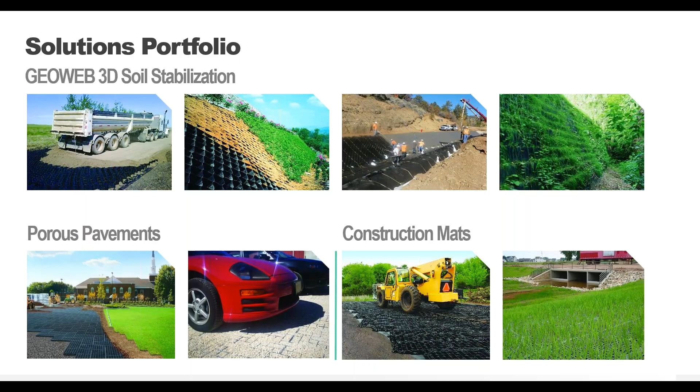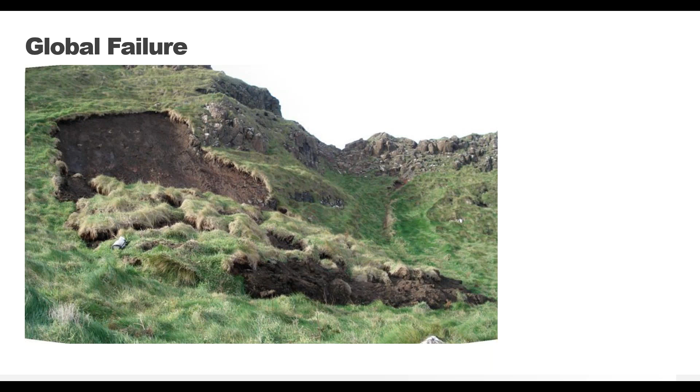We're going to start with a very quick overview of the broad classes of slope erosion. The big obvious slope failures are almost always global failures with large mass movements. We're not really going to be focusing on this type of failure and remediation today, so we'll move right along.

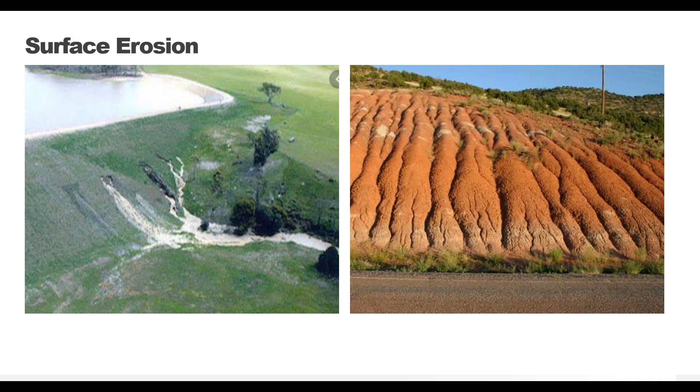Surface erosion is the name of the game today, and the main cause of surface erosion is due to water flow, whether from the crest of the slope causing rills and gullies, or coming from the middle of the slope due to an action like piping. Dams and embankments are susceptible to piping, and while the GeoWeb system can help with erosion due to piping, it will not fix the cause of piping, so keep that in mind. You can catch the on-demand webinar for flexible design solutions for resilient dams and spillways if that topic is a focus item for you. Visit prestogeo.com for more information on that webinar.

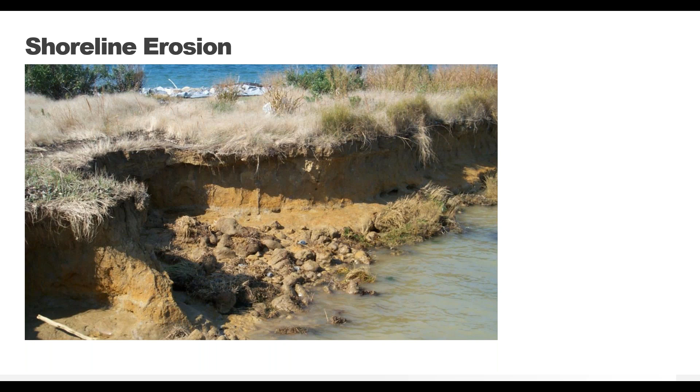Shoreline erosion occurs when rivers, ponds, and lakes create current or wave action that attacks underlying soils. Check out our upcoming webinar for reducing erosion along coastlines from rivers to oceans.

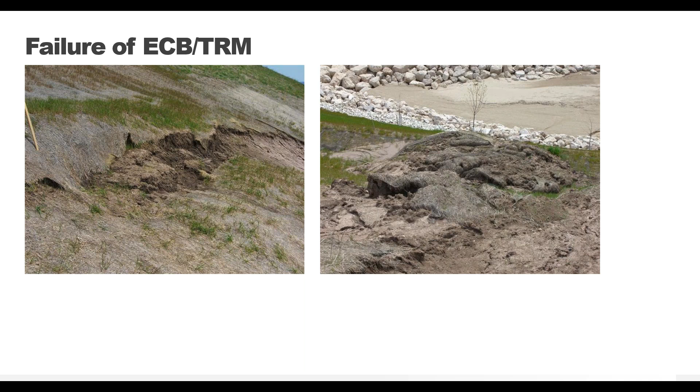Now, with all that refreshed in our minds, we'll cover some general information about GeoWeb GeoCells for those that may not be familiar with this type of product or solution.

The GeoWeb system is our version of GeoCell technology and consists of 2 main attributes. The first is the cell size. The cells come in 3 diameters: small, medium, and large, and varying cell depths. Cell sizes are selected following an evaluation of project-specific needs and site conditions.

The ultrasonically welded seam, where all the connecting points are, is very important to the function of a geocell. The stronger the seam strength, the better the performance of the geocell. Strong seams allow for heavier infill materials, steeper and taller slopes, and better lifetime performance.

GeoWeb is produced for consistently strong welds at cell junctions, while also maintaining semi-rigid ductile properties within the cell walls, high stress crack resistance, and overall toughness and long-term durability in the environment.

Our geocells do not use fillers or exotic polymer alloy blends, which can ultimately reduce weld strength and environmental stress crack resistance, and that are offered in some competing products in the name of increasing cell wall stiffness. To avoid weld failures and the damaging effects of differential settlement, uniformity in performance across all elements of your geocell system is much more important.

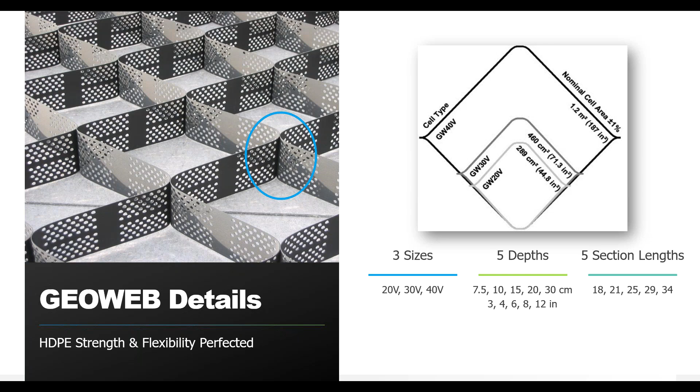The second characteristic of the GeoWeb system is the infill material. There are 4 main types of infill that can be used with the GeoWeb system based on the project type and required protection: coarse sand, topsoil, crushed aggregate, and concrete. This often allows for the use of on-site materials, eliminating the need to import fill. We'll work with you and review gradations to determine the most cost-effective infill material as part of our free project evaluation.

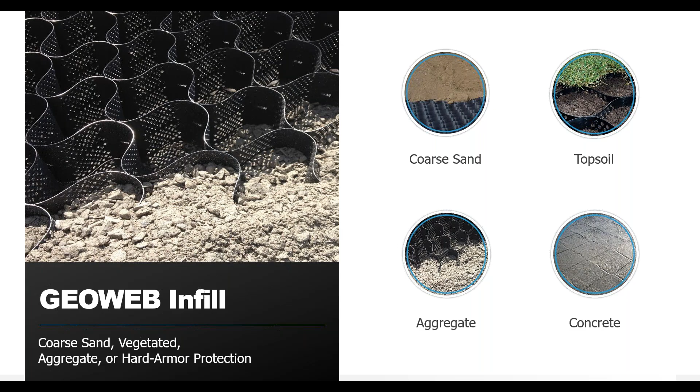GeoWeb and our accessories are 100% made in the USA under stringent quality assurance and environmental control processes. They comply with all requirements for Build America, Buy America, and the Infrastructure Investment and Jobs Act.

Speaking of quality control and the environment, Presto Geosystems, the leader in geocell technology, announces the publication of the industry's first environmental product declaration for geocells. This milestone reinforces Presto Geosystems' ongoing commitment to reliable infrastructure and environmental quality.

GeoWeb is manufactured from a proprietary blend of high-quality virgin high-density polyethylene resin and has proven its durability over the past 40+ years. GeoWeb does not contain any fillers such as calcium carbonate, recycled materials, or polymer alloys. The GeoWeb system is designed to last over 100 years, with lab tests showing it can withstand up to 149 years before any carbon black degradation, even with continuous sun exposure. We stand by our data, ensuring you can build confidently with materials you can trust.

The system components are all the supporting pieces that help the GeoWeb protect the slope surface from erosive forces. They ensure a uniform performance of the interconnected system across your entire project area.

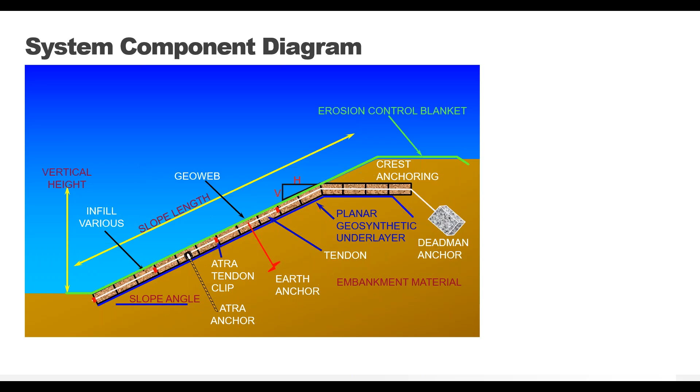The GeoWeb panels come in discrete sections with an average size of around 250 square feet per section. Your project is most likely going to be bigger than that, so multiple panels will be needed.

The AtraKey is the first component for a completely integrated system, connecting each individual panel of GeoWeb into a single web that covers the entire project site. This allows for faster installation of the GeoWeb and will last the lifetime of the project, ensuring your slope is protected and the GeoWeb system will not fail under anticipated loads.

The specific engineering values of the AtraKey will ensure the system holds up to loading over time without any corrosion like you might see in staples, or the failure of underperforming cable tie systems, or any cumbersome hand acrobatics needed with two-piece connectors. Our spec sheet calls out the specific engineering values required for this patented connector.

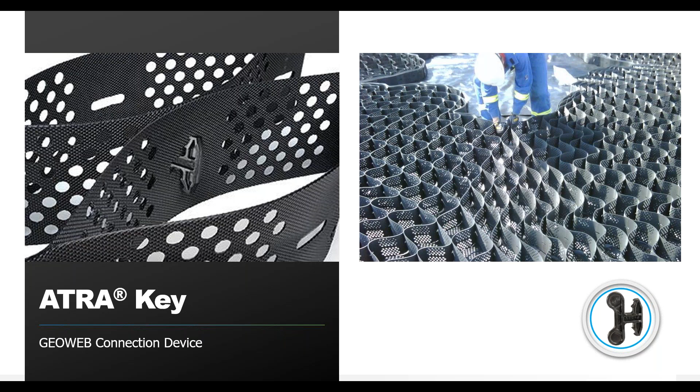Next, we can take a closer look at anchorage options. If the GeoWeb panels are laid completely flat, anchorage is usually not needed because gravity can do all the work. However, as your slope angle increases, the driving force of the infill material exceeds the available frictional resisting force, and some type of anchorage system is required.

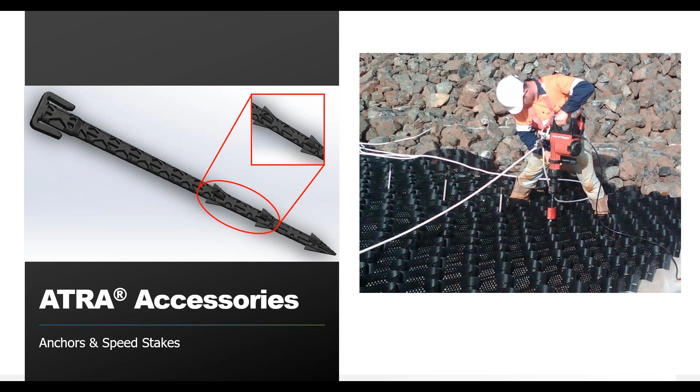For shallow slopes, think less than 2 horizontal to 1 vertical or 26 degrees, stake anchorage is usually sufficient. We have two options for stakes: one made of standard steel rebar, and one made of HDPE, shown in the left photo. If you're in a saline environment like a coastline, the HDPE speed stake is going to be a lifesaver compared to corrosion-prone steel. Stakes can be driven by hand or by power drill for easy installation.

For steep slopes greater than 2:1, where the native soil is highly erodible, or over a surface that cannot be punctured, such as a liner, a tendon anchorage system can be used. Our Atra tendon clips transfer the load from the heavy infill material to the tendons and up to the crest anchorage system highlighted in our earlier diagrams.

Only the Atra tendon clip is specifically designed to fully transfer, safely and securely, the forces placed upon the geocell. Every accessory and feature has been designed and tested to work together, so we go from problem to design to construction solution, with modeling that replicates your real-world forces.

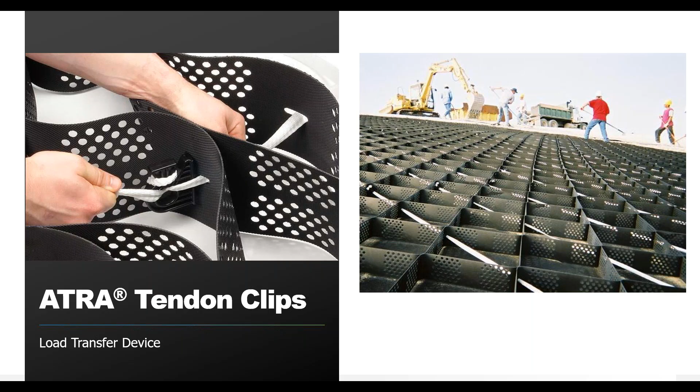The GeoWeb panels prevent significant movement of the soil by confining it to individual cells. By separating the soil into these smaller segments, the system resists mobilization of the entire slope face due to hydraulic loads, thus preventing soil erosion.

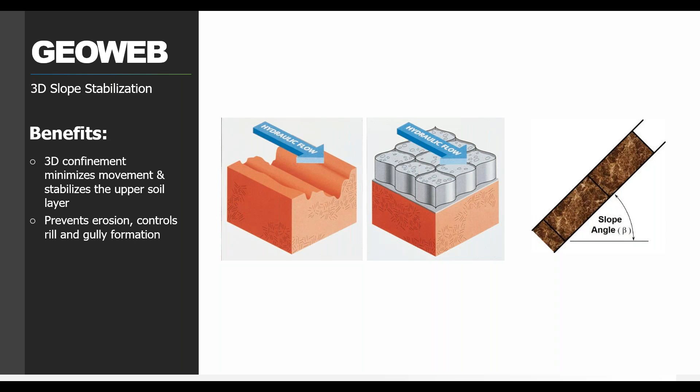It's important to reiterate that proper installation of the GeoWeb system includes embedding GeoWeb into the crest of the slope. This prevents water from flowing beneath the GeoWeb and undermining the system, so no rills or gullies form beneath it leading to failure. The system provides a way to fully vegetate slope surfaces that otherwise could not support sustainable plant life, increasing overall slope stability by interlocking with the vegetated root zone.

Stone and concrete materials can also be confined within the GeoWeb panels, again on slopes that would normally be too steep to allow for most natural stone slopes.

Vegetated slopes are the most popular option for slope protection because they can result in the most attractive appearance with little to no maintenance.

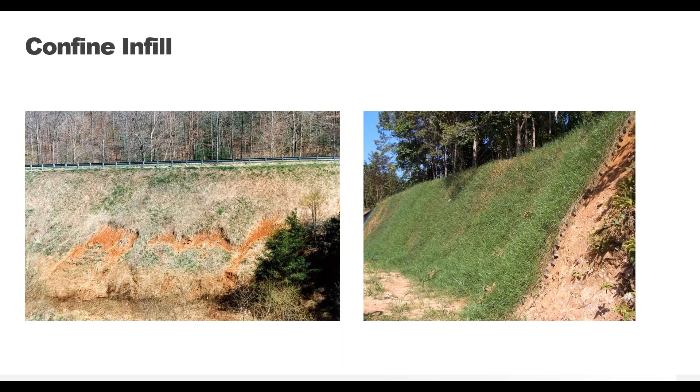Permeable slopes can be installed where high rainfall is anticipated or when construction projects are located in arid locations. This approach can aid in the design of a project by limiting runoff from the slopes and allowing water to permeate through to the underlying soil.

Hard armored slopes are most beneficial where very high water flows are anticipated, such as dam spillways or along channel walls.

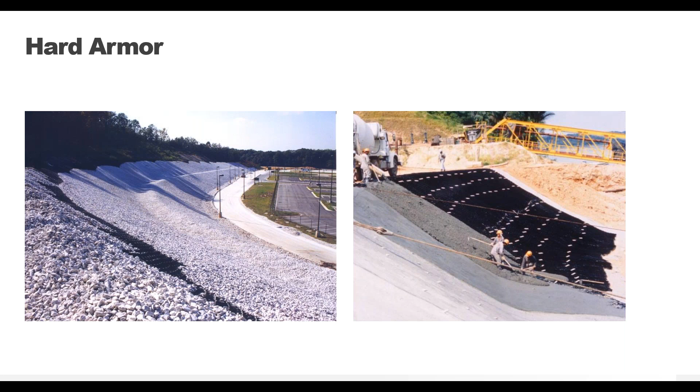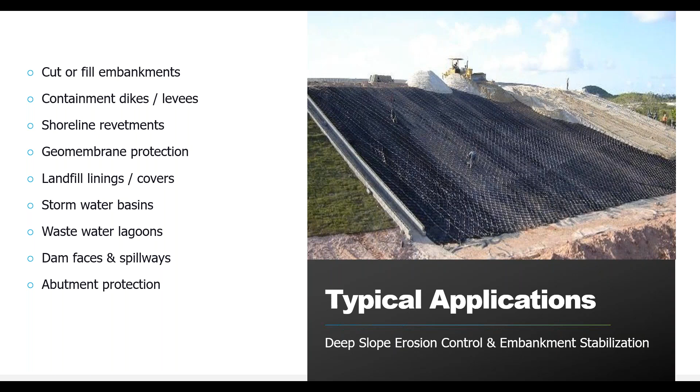Now we'll look at a few case studies to show how the GeoWeb system can be applied to different application types. Our first application type will be for vegetated slopes.

The GeoWeb system allows tall, steep slopes to be vegetated, protecting slopes that are normally too steep to vegetate with 3D erosion protection.

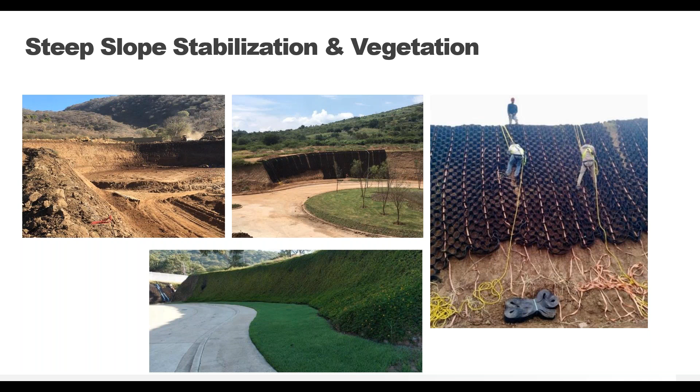Here we see space constraints at the toe of the slope in the form of another access road, so the slope could not be regraded into a gentler slope. A nice feature of the GeoWeb slope system is shown in the after photo, where a guardrail is installed at the crest and a fence is installed at the toe.

There's no limit on this sort of infrastructure being installed near or on the GeoWeb panels. That's a great benefit for tight spaces like this one.

This slope along a road in Ohio shows a common problem solved by the GeoWeb system: erosion and washout of soil from slopes onto your road surfaces.

Covering the slope with the GeoWeb system and filling with topsoil allows for a vegetated slope without the concern of having to constantly replace the soil after storm events.

We recommend some sort of surface protection, such as hydroseeding or erosion control blankets, be used over the GeoWeb panels until vegetation has had a chance to grow.

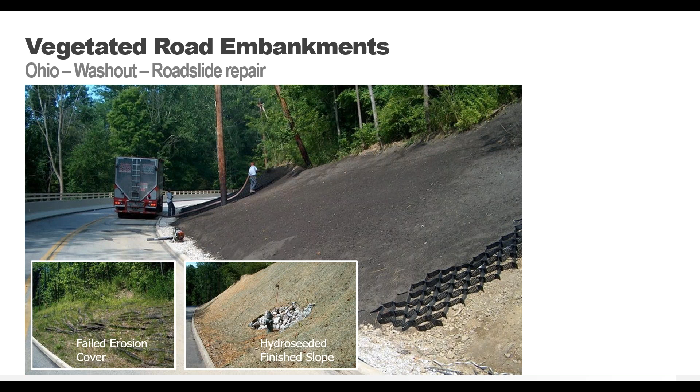Embankments along roadways have to deal with sheet flow runoff from the impervious surface, like the slope here, for a Maryland State Highway Administration project.

The sheet flow can cause sloughing of large sections of the upper topsoil layer, causing deep rills or gullies and preventing vegetation from taking hold.

The GeoWeb system holds the soil in place while allowing water to run over the surface, so no more gullies, and vegetation can form deep roots to further stabilize your slope.

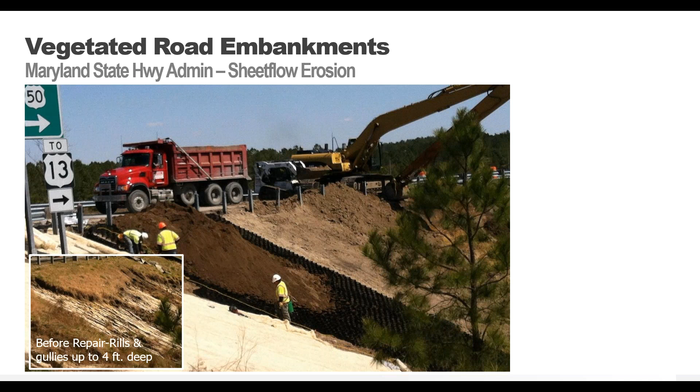Road widening is becoming more common, with DOTs trying to find more roadway space without displacing any significant structures. The slopes or embankments are usually where that additional space can be found, as shown in this road widening project in New Hampshire. The GeoWeb slope protection system allowed for steeper slopes to be created without erosion concerns. The system can be installed and vegetated quickly, so there's not a long construction time to shut down your important roadways. Ease of speed and construction are important features of the GeoWeb system that everyone appreciates.

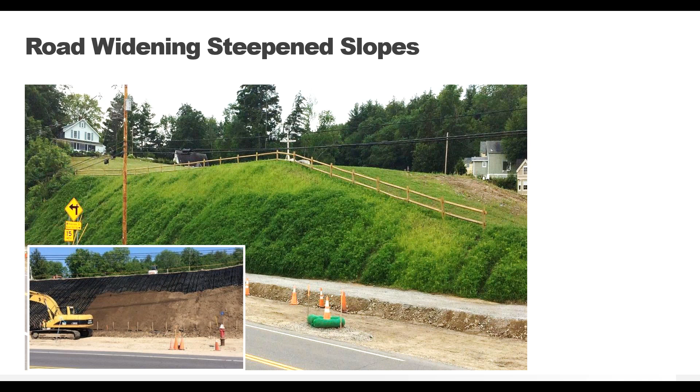This next example shows the GeoWeb system along a shoreline embankment of a large pond. This is also a vegetated system and was used to help stabilize the embankment and prevent further erosion. This crew did not take advantage of power hammer drills because it was a small project.

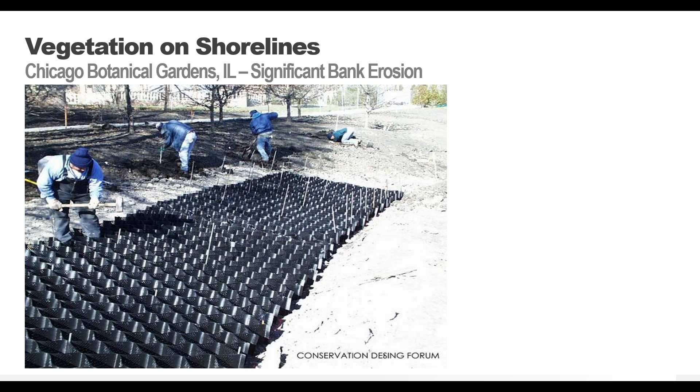Sheet piles were put in place to allow for a dry construction environment, and this time the GeoWeb panels were anchored using stakes because the slope angle and slope height were pretty low. The GeoWeb was filled with native soil from the pond, so the same plants would grow over this area, creating a seamless look.

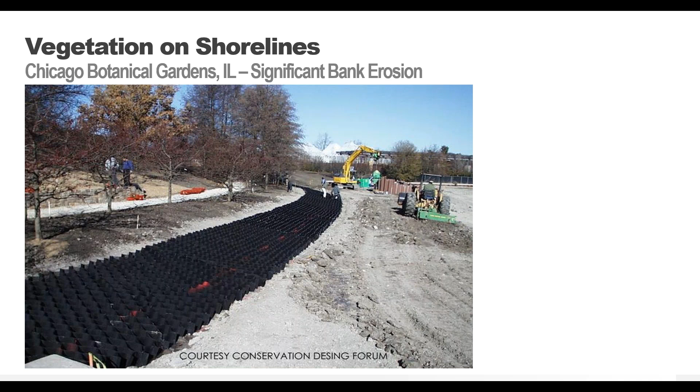And once the GeoWeb system was in place, the sheet piles were removed, and there's now a thriving water garden in place with a much more attractive and stable shoreline that requires very little maintenance.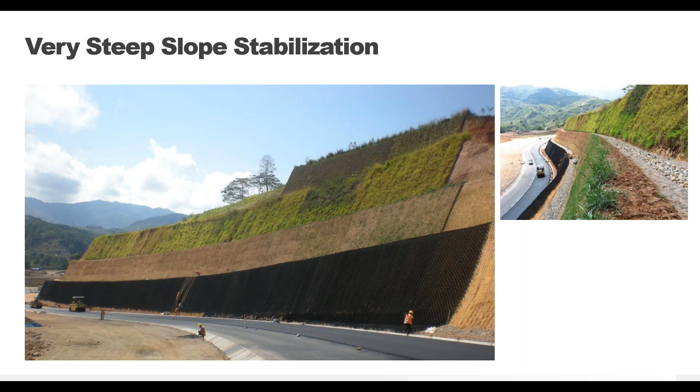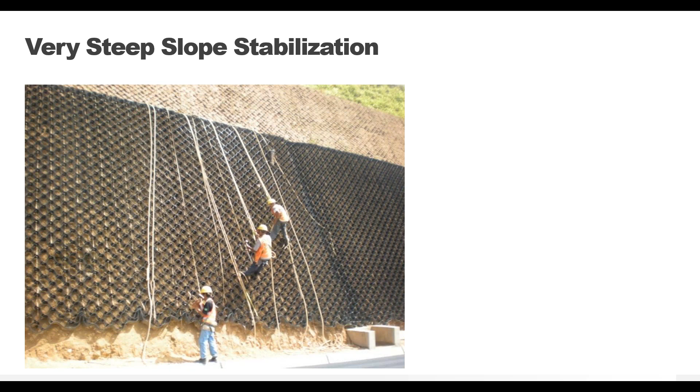The project required tendons through every row of the GeoWeb panels due to the steepness and the weight of the infill, and earth anchors were used at the crest of each slope because a dead man trench would not fit on top of the narrow terraces. They also chose to use a biaxial geogrid beneath the GeoWeb for additional soil control.

And here's the final product. The vegetation has taken hold and the slopes are stable, even at such extreme slope angles.

This case study shows the GeoWeb system used to stabilize the cliff between Scarborough Spa and the Esplanade on Scarborough's South Cliff. The project involved piling along the rear of the spa complex with horizontal drainage components and regrading of the slope to address instabilities and protect this historical building.

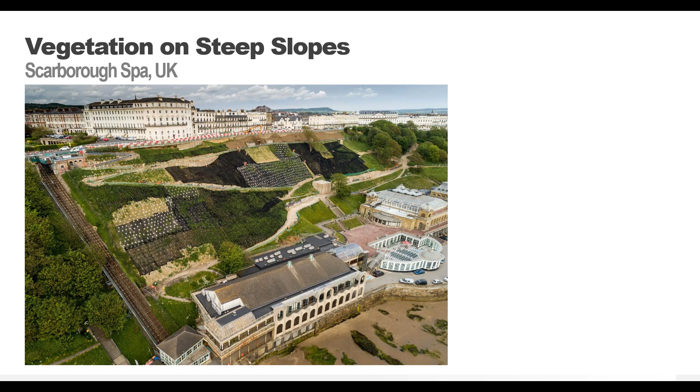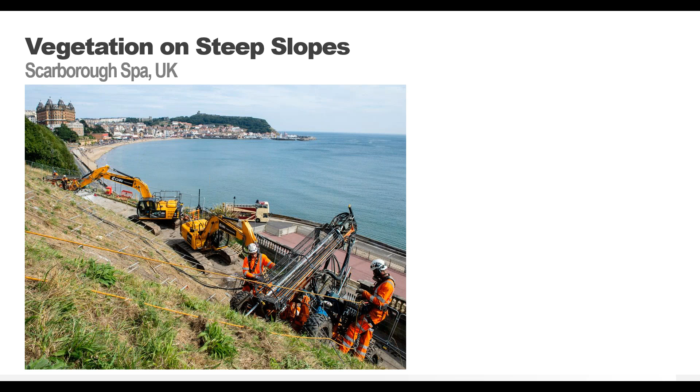Over 4,500 soil nails were installed for reinforcement, and the GeoWeb system installed for revegetation of the slope face and for surface stabilization.

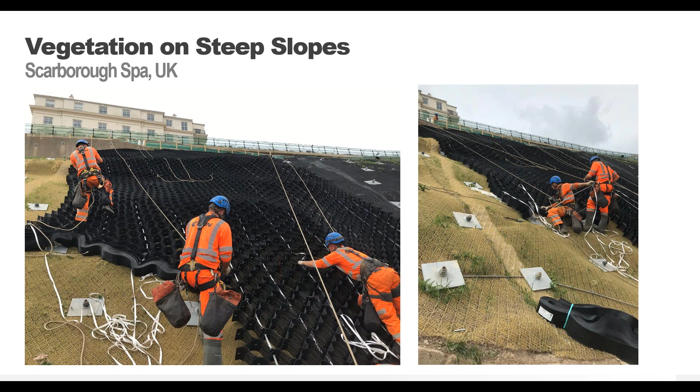The GeoWeb system, with patented ATRA Tendon Clip load transfer devices and a 6-inch or 15-centimeter GeoWeb geocell, secured the system to the slope with a fast and safe installation, even on slopes with varying steepness, including up to 60 degrees and around existing trees and walls, like you see here.

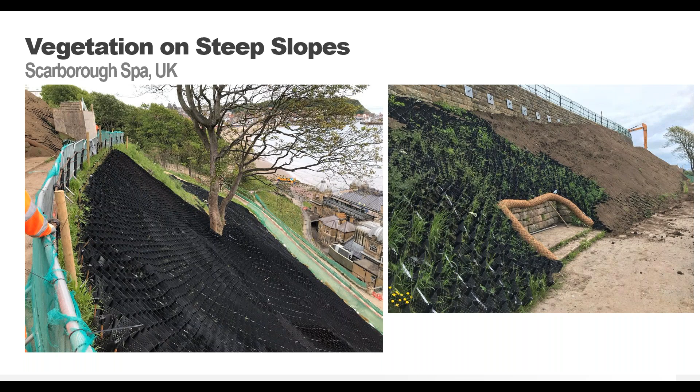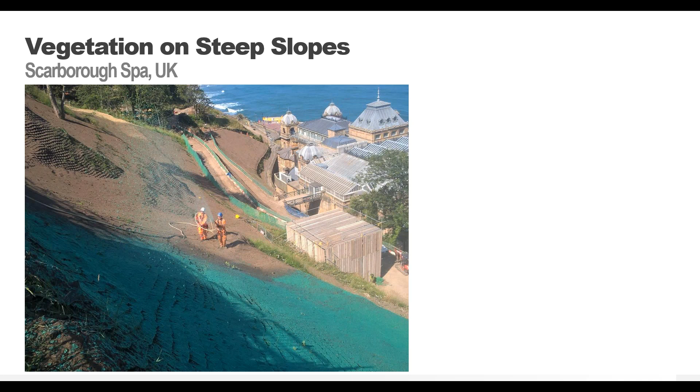Once the GeoWeb system was secured, over 3,600 tons of topsoil was placed and hydroseeded, with the teams working collaboratively with Presto Geosystems and our local agents Greenfix for this permanent stabilization solution.

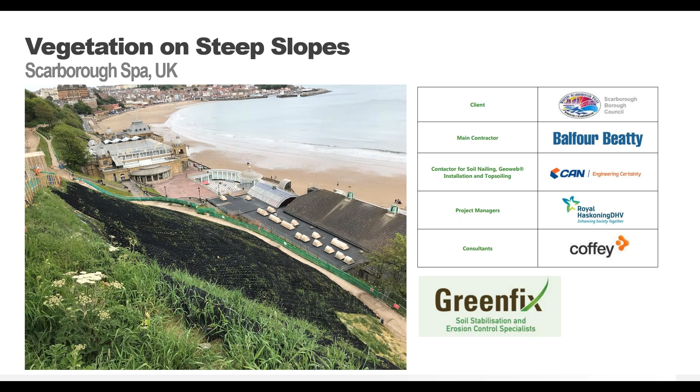The Scarborough Borough Council confirms this slope stabilization project has resulted in the protection of 380 homes and 38 key businesses with a combined value of £114 million.

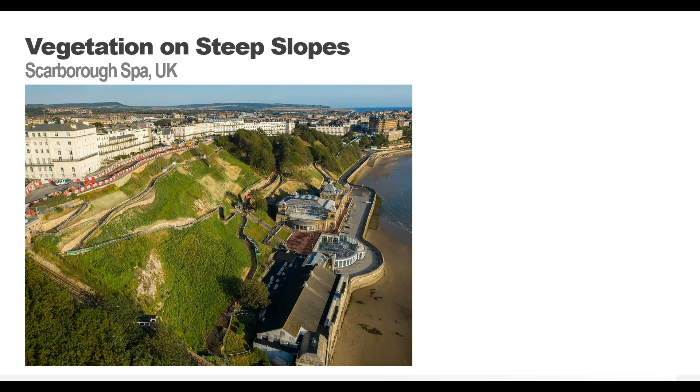The next application type will be aggregate slopes. Aggregate infill can provide a low maintenance solution, great for areas where vegetation may not grow easily or where stone is more common. Aggregate infill allows for water infiltration, so it can collect runoff from your road surfaces and be kept clean fairly easily.

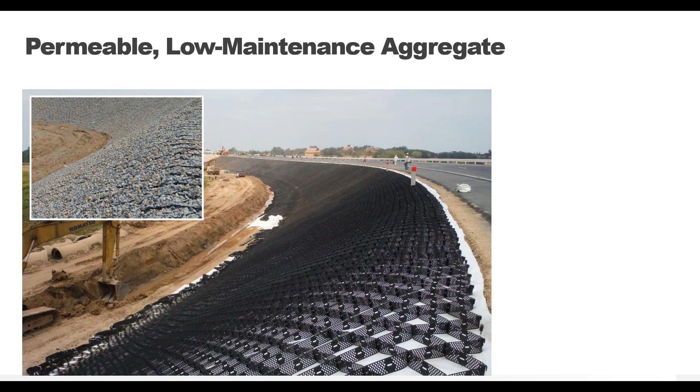The 194th Avenue Slope Protection Project in Calgary focused on stabilizing a steep slope adjacent to a geosynthetic reinforced soil structure. The 1-to-1 slope's south-facing orientation and lack of irrigation made it especially susceptible to erosion, compromising the existing vegetated cover's stability.

In response to the need for a durable, low-maintenance solution that would seamlessly blend with the natural environment, Layfield Canada recommended the GeoWeb slope stabilization system. This choice was driven by its exceptional erosion control properties, addressing the slope's specific protection requirements while ensuring long-term stability and visual harmony with the surroundings.

Many underpasses around Calgary have mountainscape designs using concrete, and this design would have a similar aesthetic.

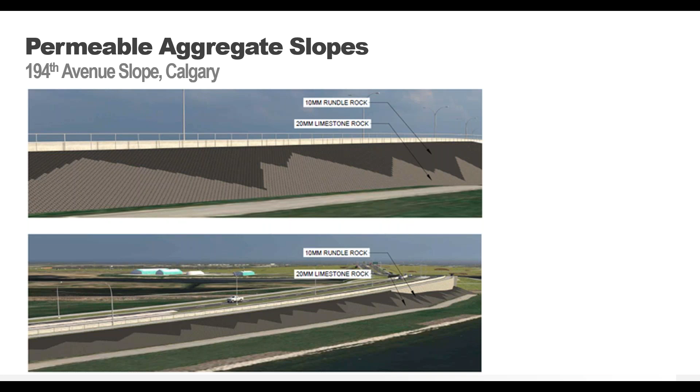A non-woven geotextile separation layer was placed, followed by the 30V4 GeoWeb geocells and TP225 tendon anchored by earth anchors strategically positioned at the crest of the slope to secure anchoring of the system. The ATRA tendon clip load transfer devices were placed in accordance with total load calculations determined as part of our free project evaluation in collaboration with project engineers.

The civil works were done by Graham Construction, installed by Wire Construction. The geotechnical testing done by Terracon, with project design by ISL Engineering, and the teams working collaboratively with Presto Geosystems and our local agents, Layfield, for this permanent stabilization solution.

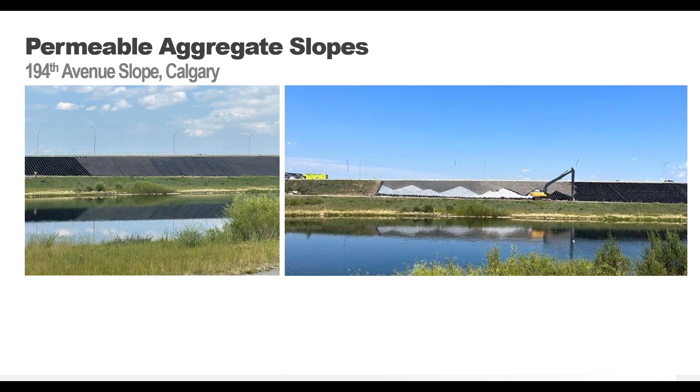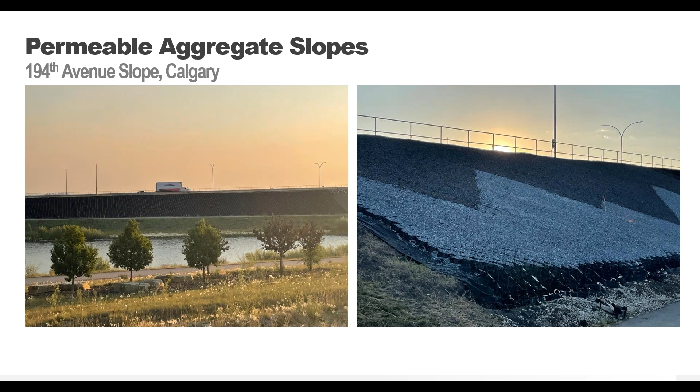The system came together quickly. After the GeoWeb system was secured, the stone fill was meticulously arranged within the GeoWeb's 4-inch deep cells to craft an aesthetically pleasing mountainous landscape on the slope with permeable aggregate.

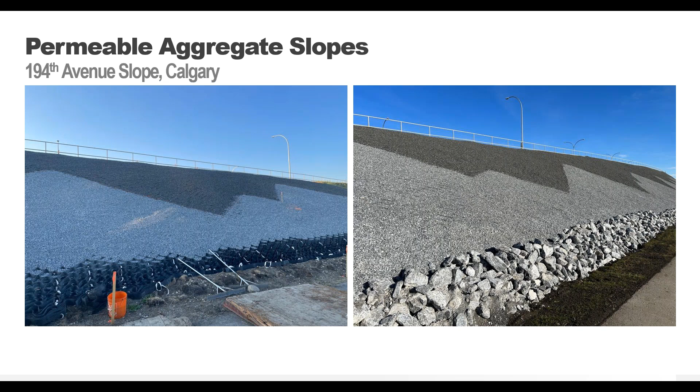And this project seamlessly combined functionality with landscape aesthetics for the 194th Avenue slope in Calgary.

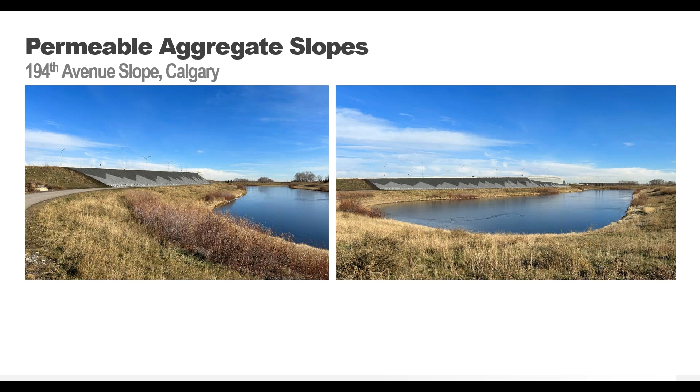The Minnesota DOT and the Wisconsin DOT, in collaboration with Presto Geosystems, Ames Construction, SRF Consulting, used the GeoWeb system to help stabilize the surface around bridge abutments and along railroad tracks and crossings as part of the Dresbach Bridge project.

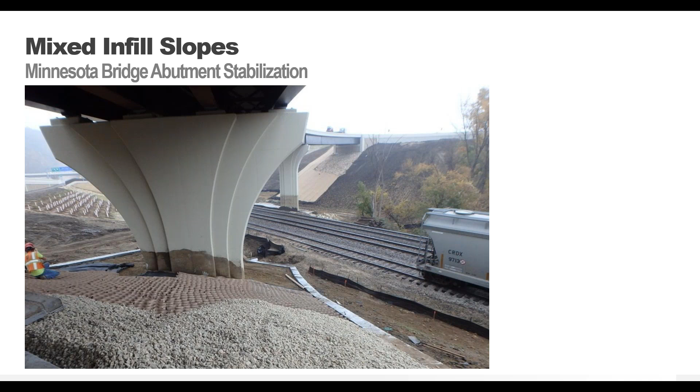The I-90 bridge over the Mississippi River between La Crosse, Wisconsin and La Crescent, Minnesota is a heavily used commuter route and part of the nation's longest interstate, Highway I-90, providing vital infrastructure for our nation.

The project goals were to provide a new structurally sound bridge meeting current structural and geometric standards, provide a reconstructed interchange, improving traffic safety, capacity, and access, and to ensure the resulting bridge and interchange fit naturally into the beautiful surroundings created by the bluff and river environment.

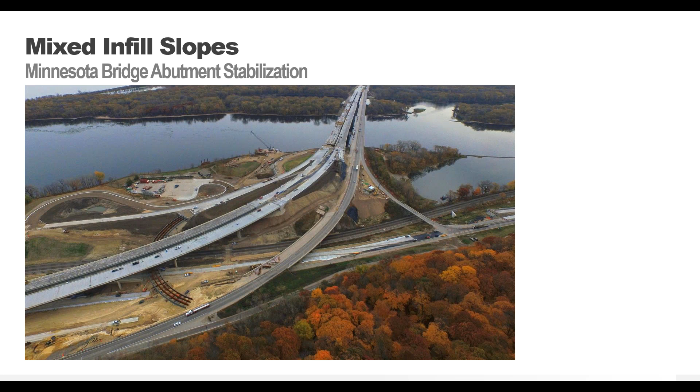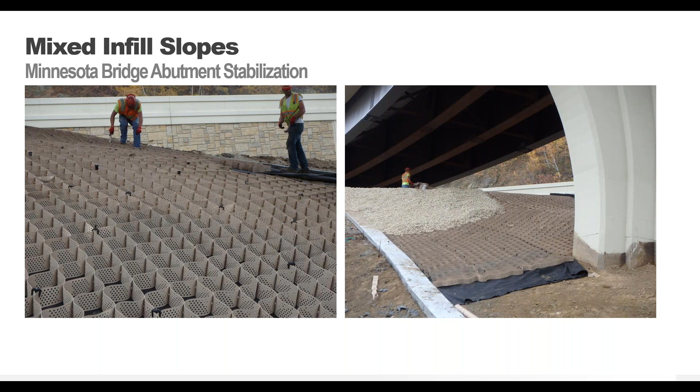Sand-colored GeoWeb was placed over a non-woven geotextile separation layer and used below bridges with aggregate infill where vegetation was not an option.

With the GeoWeb panels closely matching the color of the local aggregate for additional aesthetic appeal.

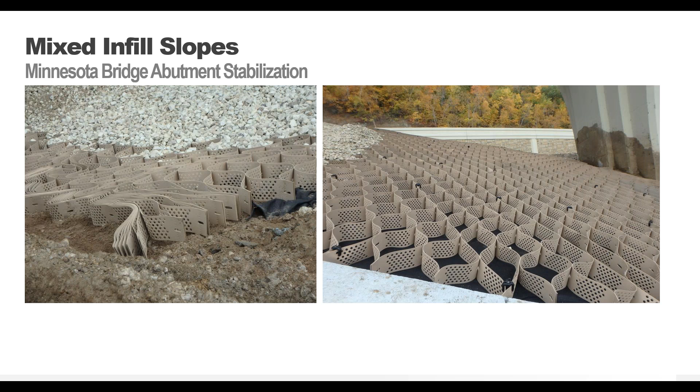Standard black GeoWeb sections were filled with topsoil, covered with an erosion control blanket, and vegetated on the slopes beyond the bridge abutment areas.

And the end result accomplished its goals of aesthetics and function, earning SRF and the Minnesota DOT the American Council of Engineering Companies of Minnesota Engineering Excellence Grand Award.

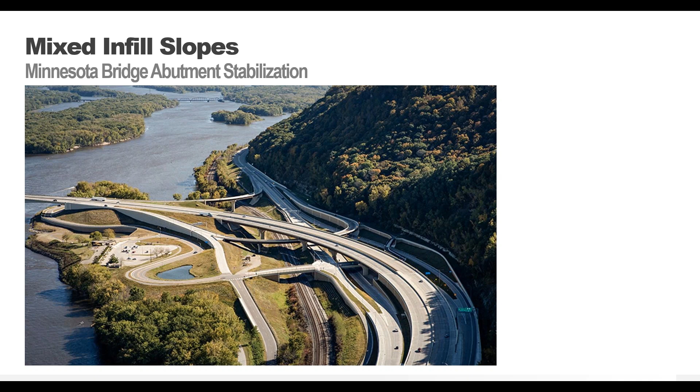The versatility of the GeoWeb system allows for a variety of infill, whatever best meets your project needs. In this case of a quarry abutting a roadway, aggregate fill was used on most of the slope, with concrete fill in higher flow areas. Which brings us to our next type of slope protection.

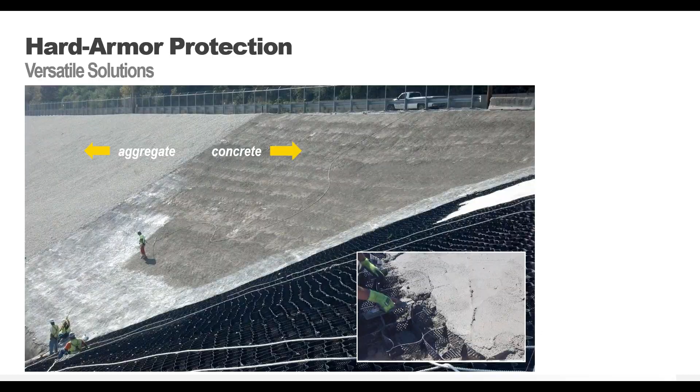The flexible, hard armored protection of concrete-filled GeoWeb slopes.

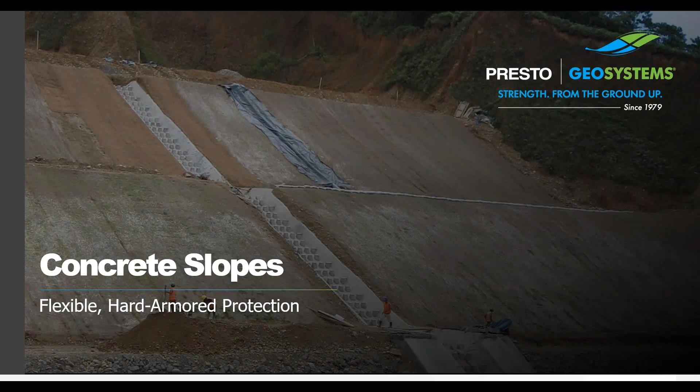Concrete infill is our last main infill type, and the system would no longer be considered permeable, but there are no maintenance requirements, and the embankments can handle significant amounts of stormwater runoff if needed.

The GeoWeb panels act as the formwork for the concrete and as the internal reinforcement, so no additional forms or rebar are required. The concrete is poured directly into the GeoWeb panels and screeded to the top of the cell walls, ensuring a consistent concrete depth without it slumping to the toe of the slope.

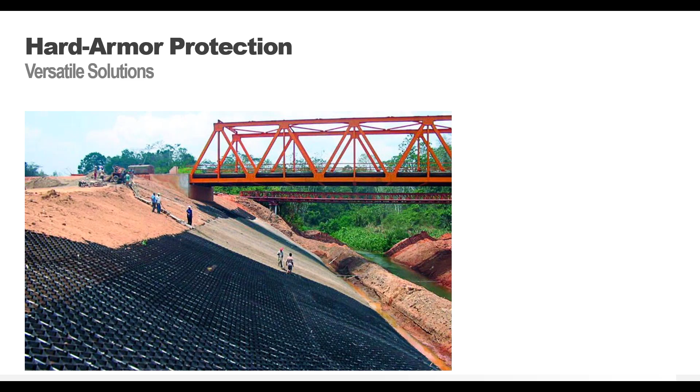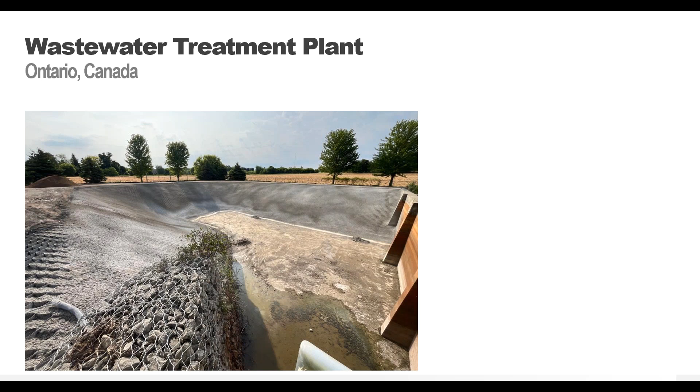The GeoWeb was installed at the facility's lagoon per evaluation recommendations with a tendoned anchorage system to protect the liner and prevent erosion.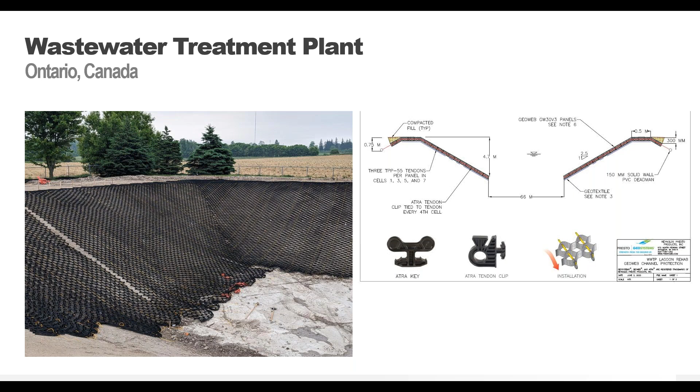The system was infilled with concrete as shotcrete, shooting the material straight into the cells and at low pressure, as you see in the photo on the left.

The contractors installing it said it was one of the easiest and fastest installations they had done, and will be recommending this treatment for upcoming projects.

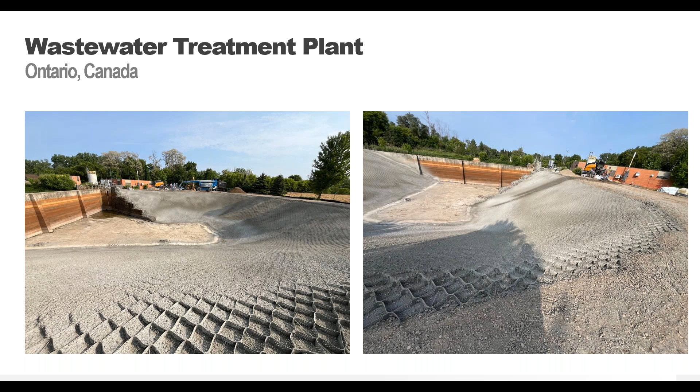This case study is for a concrete-filled GeoWeb slope at the U.S. Olympic Park in Utah. The mountain manager contacted Presto for assistance with designs for a 160-foot ski jump for freeskiers and snowboarders.

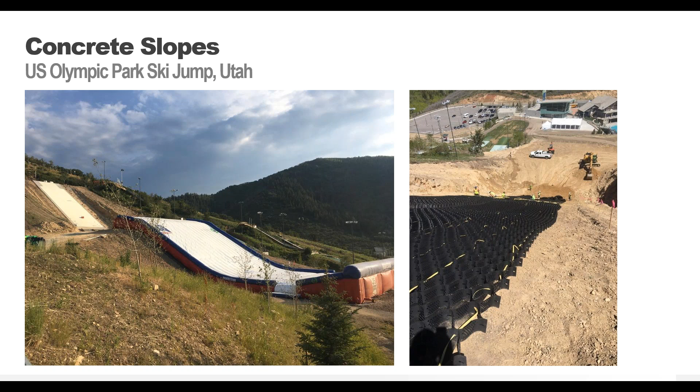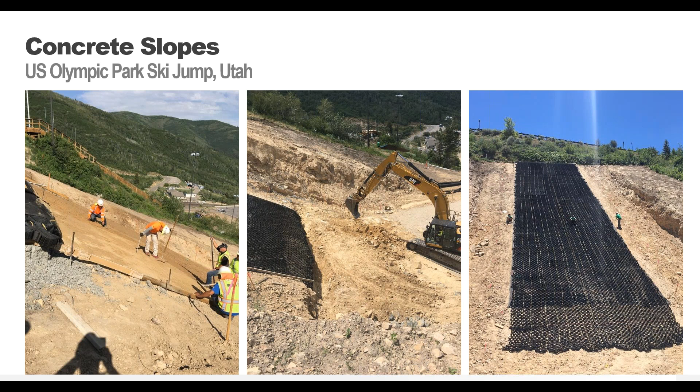It was important the subgrade surface below the GeoWeb material be graded very precisely. To secure the GeoWeb systems over the slope, a 6-inch deadman anchor was buried behind the crest runout with tendons and Atra-Tendon clip load transfer devices. Sections were connected side to side and end to end with Atra-Key connectors.

The concrete infill was poured in 15-foot sections, the full width of the ski ramp, in an alternating pattern starting at the top and working down the slope.

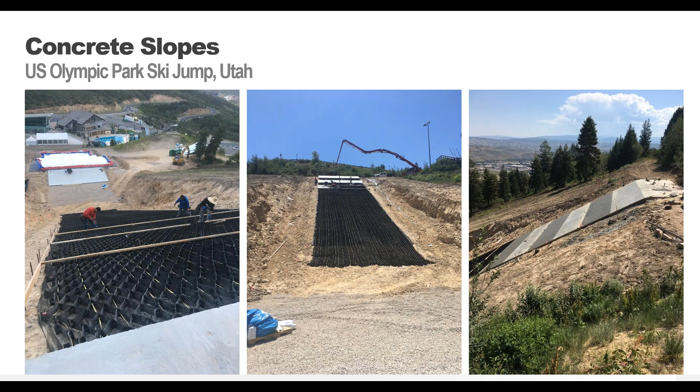Ski tiles, 4 inches by 36 inches, overlapped from top to bottom, were affixed to the concrete ramp with ram-set anchors. An even surface from tile to tile is critical to provide the athlete a perfect in-run on a snowboard or pair of skis and be able to practice their trick properly.

Once all the tiles were affixed, the two-piece jump was assembled and the airbag installed and anchored below the jump. Note that the athletes only use this equipment in the summer, as they prefer to practice on real snow in the winter.

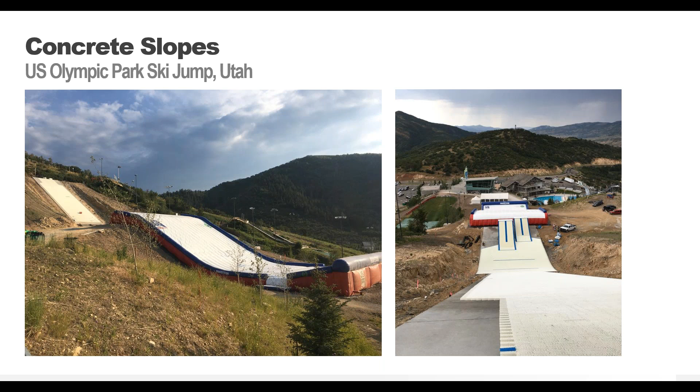Here's a quick video of how Olympic jumpers can use the slope for off-season training thanks to GeoWeb stabilization, and the test run by one of the installers, who, to my knowledge, has not yet become an Olympian.

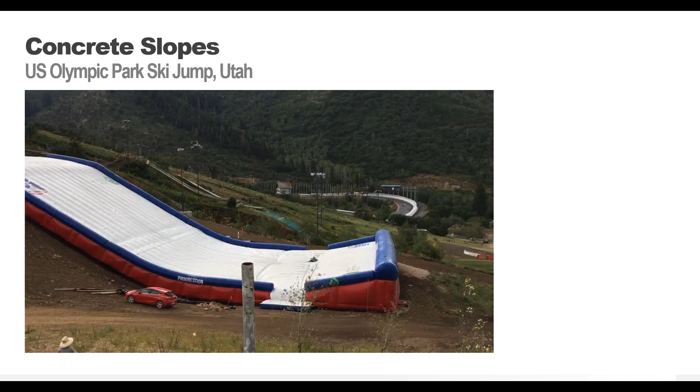The GeoWeb 3D soil confinement system has great flexibility of design and a variety of infills to meet your project needs. Steep slope protection is not out of the question when using the GeoWeb system, and this is a complete system solution for ease of installation and peace of mind.

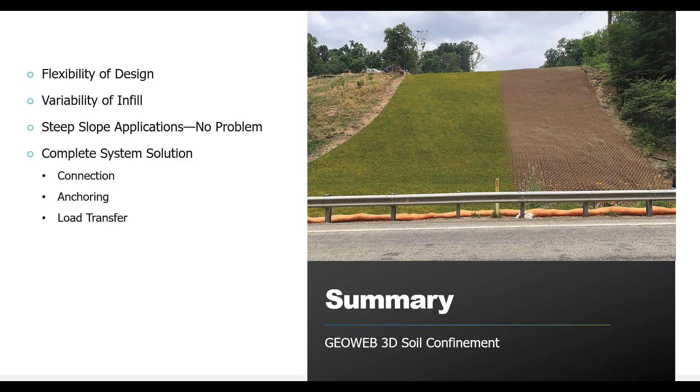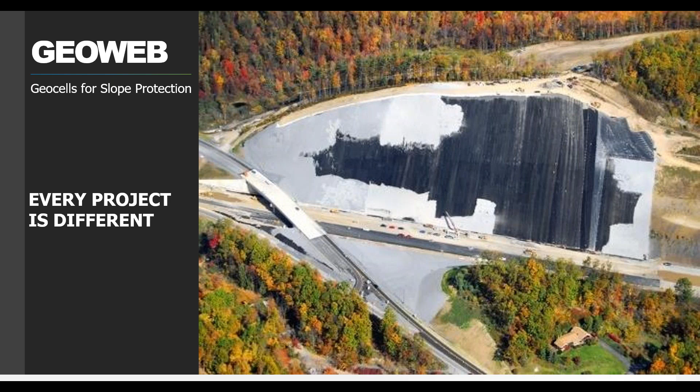Every project is different, but Presto Geosystems has a solution that's right for you. The GeoWeb system can be added to projects to provide a more stable, longer lasting, and flexible system, and it's a complete system solution for ease of installation and peace of mind.

Part of our complete solution is our technical assistance. The engineering team here at Presto Geosystems works closely with landscape designers and engineers, offering a free project evaluation service for any road, embankment, or erosion control project.

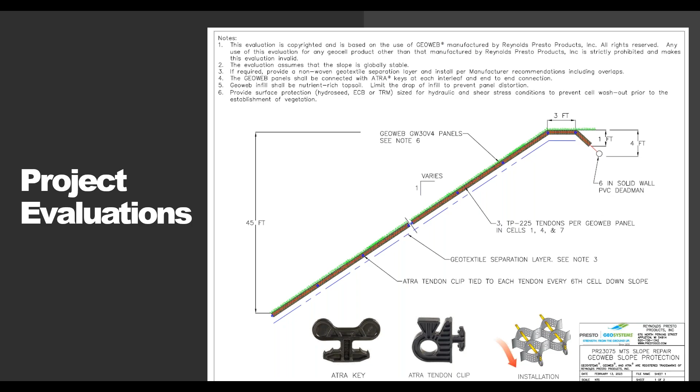We deliver quality and over 40 years of expertise, guaranteeing that each shipment meets or exceeds our specs, so you can deliver certainty and build with materials you can trust. No disclaimers or concerning fine print.

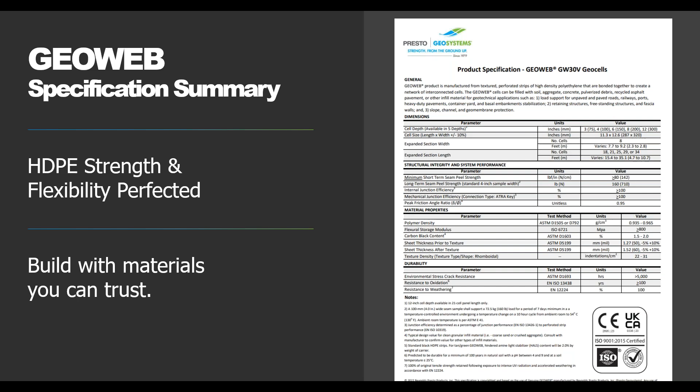One of the biggest questions we get is about cost. No surprise there, especially if this is a new technology for you or your area. Having an idea of how much the GeoWeb system costs compared to other stabilization techniques is very important. With slope options, it kind of depends on the type of system, type of infill, height, angle, etc.

In fact, a 40% savings can be realized compared to the geogrid and geotextile section, which does not allow for the use of most salvaged or on-site material, as high friction angle, well-graded materials are required for the use of most grids and textiles. Of course, your aggregate costs, distance to quarry, etc. might vary.